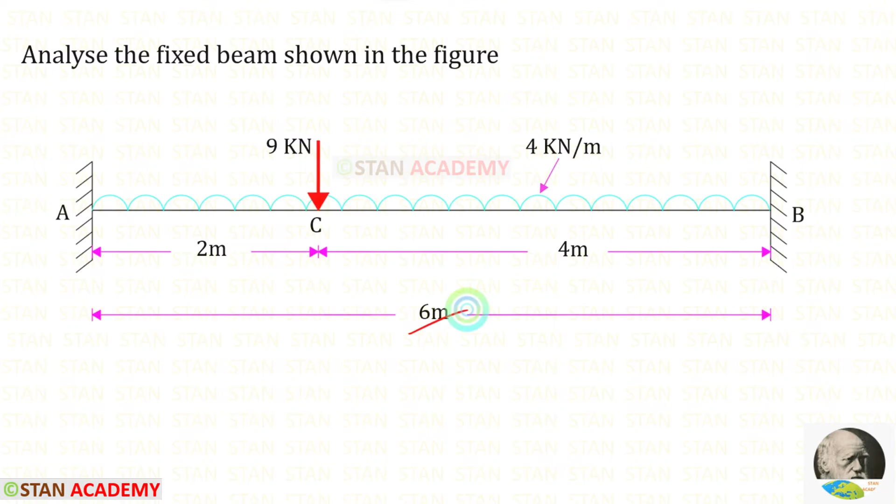To find the fixed end moments at point A and point B, let us use formulas. If the fixed beam is subjected to a uniformly distributed load for the whole span, the formulas to find the fixed end moments are WL square upon 12 and WL square upon 12. Both formulas are the same, but the moment at point A will act in the anticlockwise direction,

and the moment at point B will act in the clockwise direction. If the fixed beam is subjected to an eccentric point load W, the formulas to find the fixed end moments are WAB square upon L square and WA square B upon L square. Here also the moment at point A will act in the anticlockwise direction and the moment at point B will act in the clockwise direction.

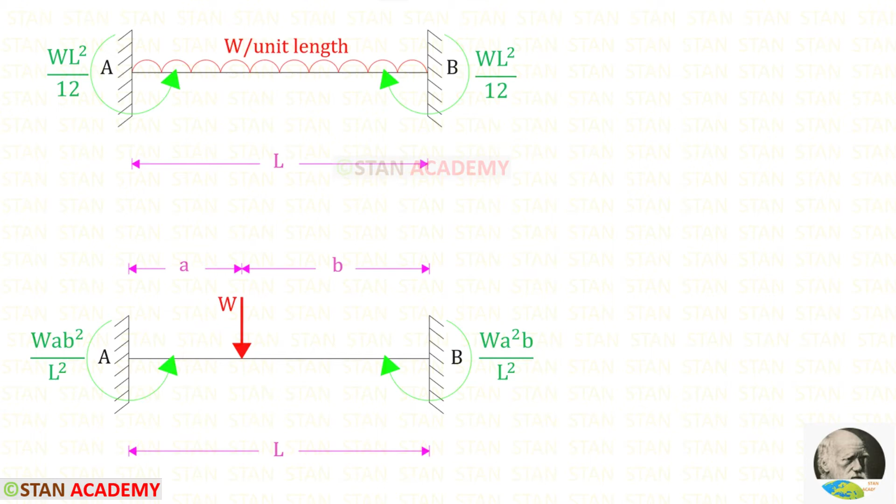Now using these formulas, let us find the fixed end moments. First, let us take the point load 9 kN. We have just seen the formulas WAB square upon L square and WA square B upon L square. Here W is 9, A is 2, B is 4, L is 6. Let us apply them in the formulas.

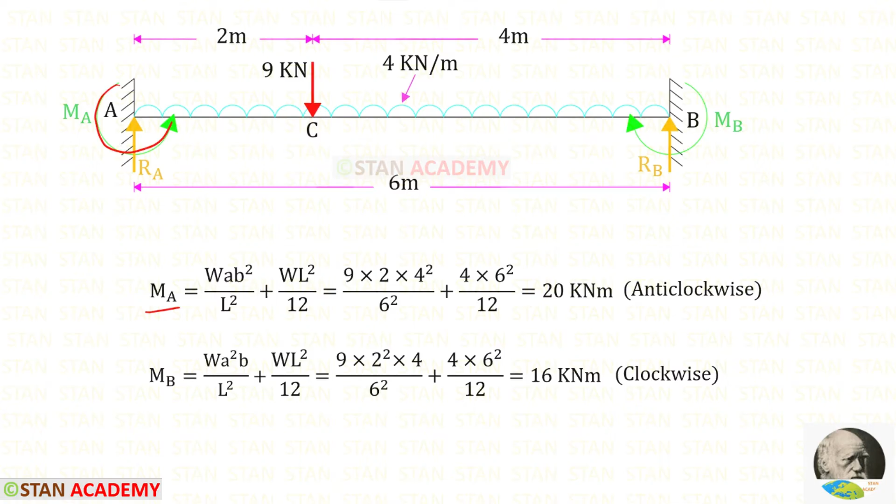Now let us take the uniformly distributed load of 4. We have seen the formulas to find the fixed end moments. Both formulas are the same, WL square upon 12 and WL square upon 12. Here W is 4 and L is 6. When we add these two, we get 20 kilonewton meter, and when we add these two, we get 16 kilonewton meter. We know that MA will act in the anticlockwise direction and MB will act in the clockwise direction. We have calculated the fixed end moments MA and MB.

Now we are going to find the vertical reactions RA and RB. First, let us find RA. For that, I am going to take a moment about B. In this case, we are moving towards the right hand side. Clockwise will be positive and anticlockwise will be negative.

The moment MA is acting in the anticlockwise direction, so it will be negative. RA is acting in the clockwise direction, so it will be positive, and the distance is 6, so 6 RA. The point load 9 is acting in the anticlockwise direction, so it will be negative, and the distance is 4. The UDL 4 is also acting in the anticlockwise direction, so it is also negative. For the UDL, we have to multiply with the distance and the distance by 2. The moment MB is acting in the clockwise direction, so it will be positive. Finally, for RA, we are getting 18.667 kilonewton.

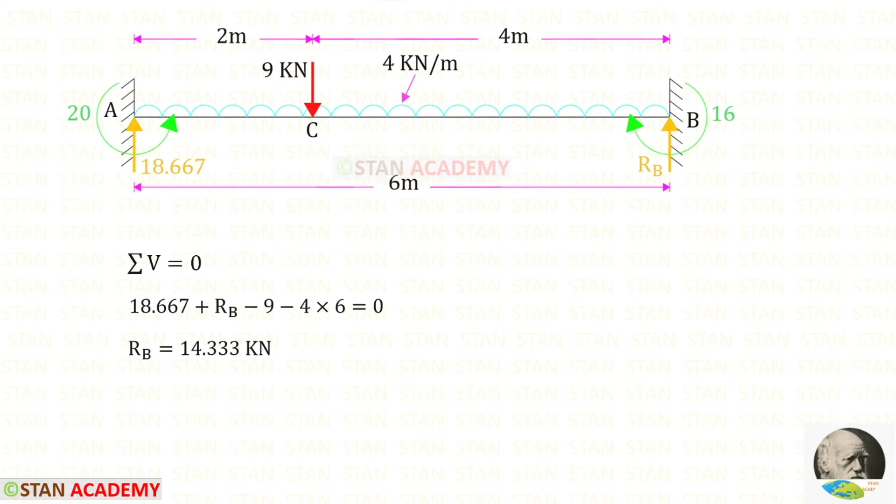Now let us apply the rule sigma V equals 0 and find RB. RA and RB are acting upwards, so both are positive. These two loads are acting downwards, so both are negative. With the UDL, we have to multiply by the distance. Finally, for RB, we are getting

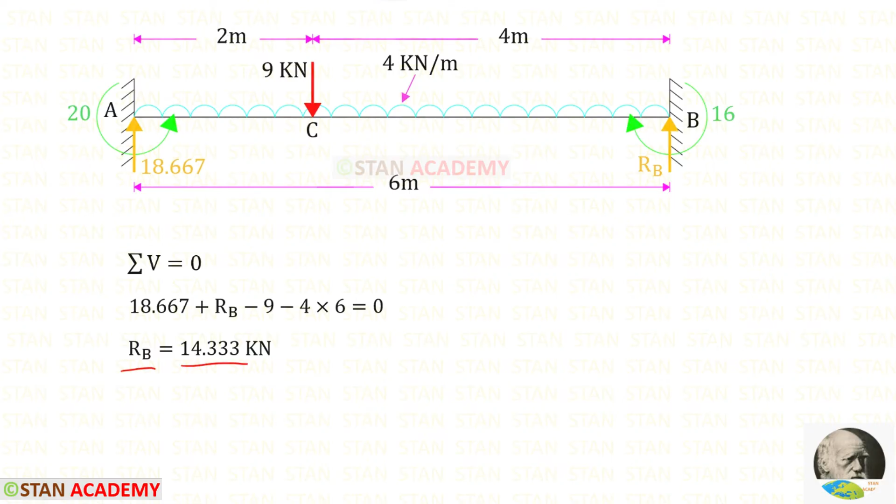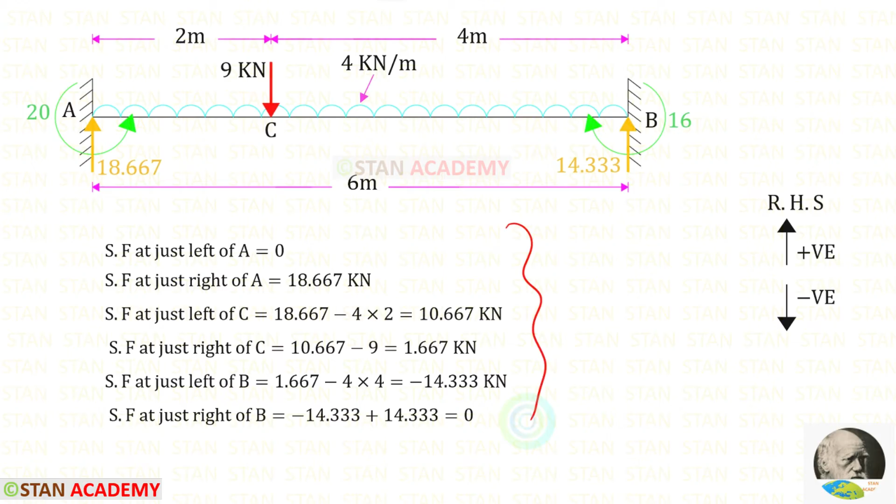14.333 kilonewton. Now we are going to draw the shear force diagram. I am going to find the shear force values from point A towards point B. In this case, I have to follow the right hand side rule: upwards will be positive and downwards will be negative. Here you can see the calculations, and here you can see the shear force diagram.

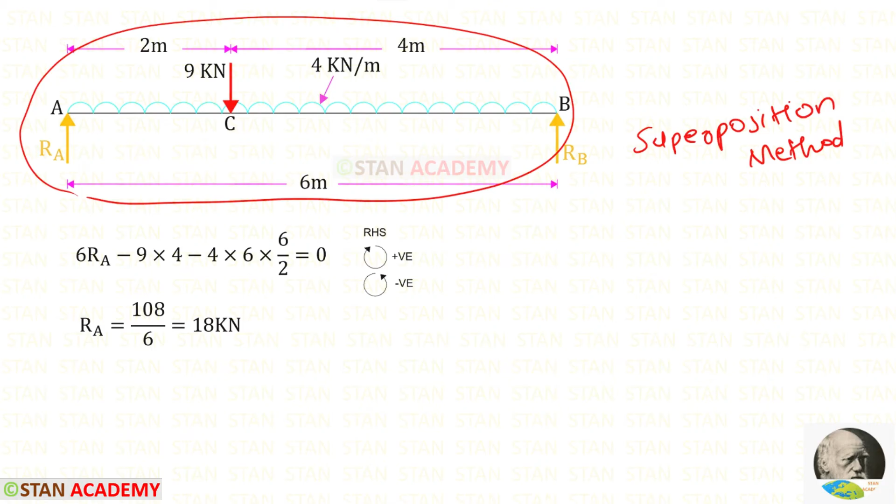Now we are going to draw the bending moment diagram. The bending moment diagram can be drawn in two ways. The easiest method is the superposition method. In this method, first we have to convert the fixed beam into a simply supported beam. You can see that I have converted the fixed beam into a simply supported beam. Now we have to draw the bending moment diagram for this simply supported beam.

First, let us find the reaction RA. For that, I am going to take a moment about B. In this case, I am moving towards the right hand side. Clockwise will be positive and anticlockwise will be negative.

RA is acting in the clockwise direction, so it will be positive, and the distance is 6, so 6 RA. The load 9 kN is acting in the anticlockwise direction, so it will be negative, and the distance is 4. The UDL 4 is acting in the anticlockwise direction, so it is also negative. For the UDL, we have to multiply with the distance and the distance by 2. Finally, for RA, we are getting 18 kN.

Now let us apply the rule sigma V equals 0 and find RB.

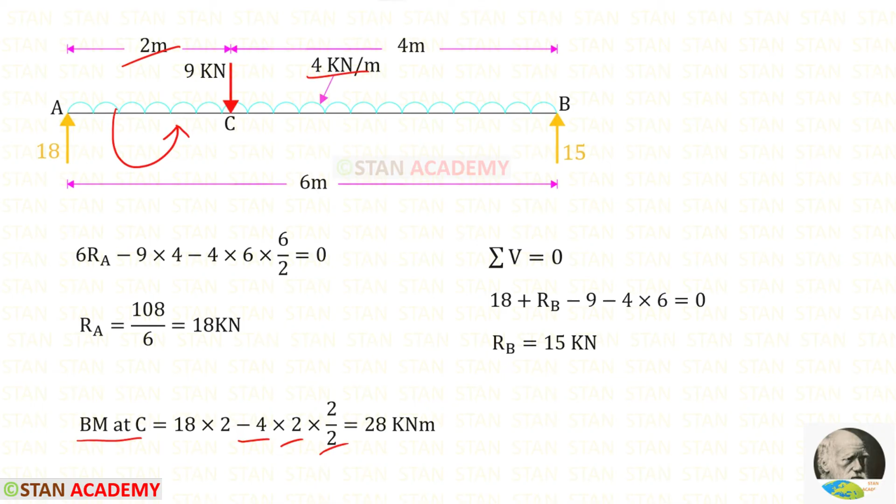Now let us find the bending moment at point C from point A. RA is acting in the clockwise direction, so it will be positive, and the distance is 2. The uniformly distributed load is acting in the anti-clockwise direction, so it will be negative. For the UDL, we have to multiply with the distance and distance by 2. So for the bending moment at C, we get 28 kilonewton meter.

Now we can draw the bending moment diagram. We have a uniformly distributed load for the full span, so the diagram will be in parabolic shape. This diagram is called the free moment diagram, and this diagram is positive.

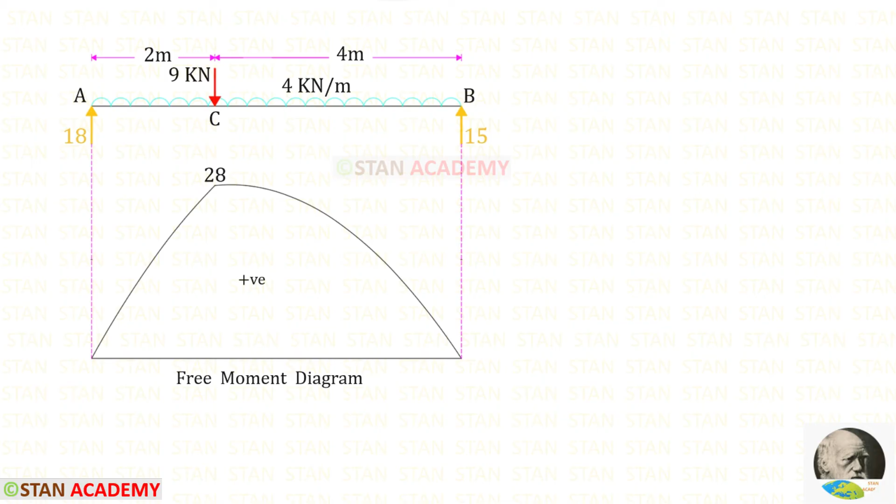Now let us draw the end moment diagram. For MA we have got 20 and for MB we have got 16. We know that MA was acting in the anti-clockwise direction and MB was acting in the clockwise direction. We have to see the direction of the arrows. Both of the arrows indicate upwards, so the diagram will be coming above this line.

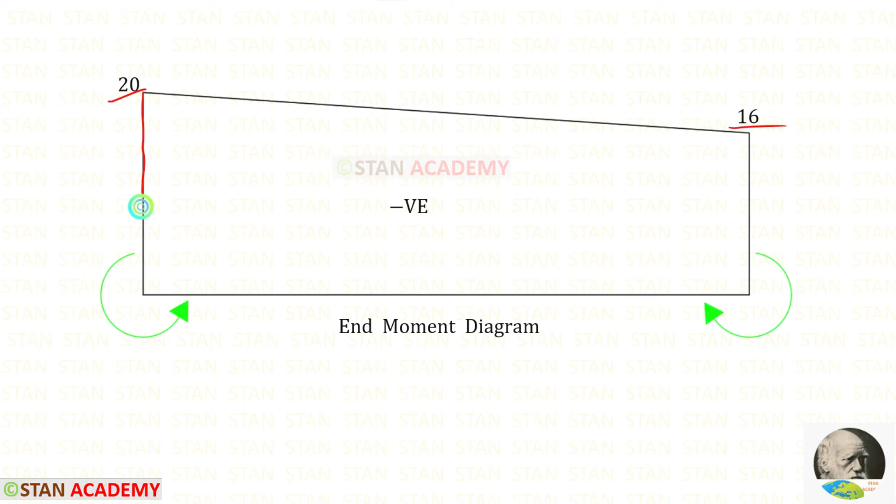Since 20 is bigger than 16, we have to make this line a little higher. Then we can combine both of the diagrams so that we get the bending moment diagram. Where both of the diagrams are combined, we should not mark anything; we just keep the space empty. Wherever they are acting alone, we have to mark with the signs.

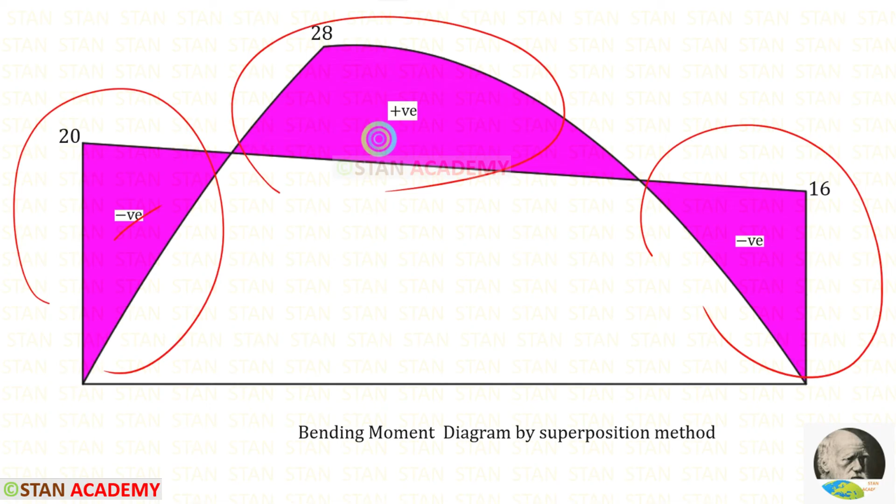We have drawn this diagram by the superposition method. Alternatively, we can draw the bending moment diagram considering all of the points. But it is up to you, you can either follow the previous method or this method, whichever is easier for you.

Here we have to find this ordinate, which is the value of maximum positive bending moment. For that, we have to see the shear force diagram where the shear force becomes 0. At this point, the shear force becomes 0, and at this point, there will be maximum positive bending moment.

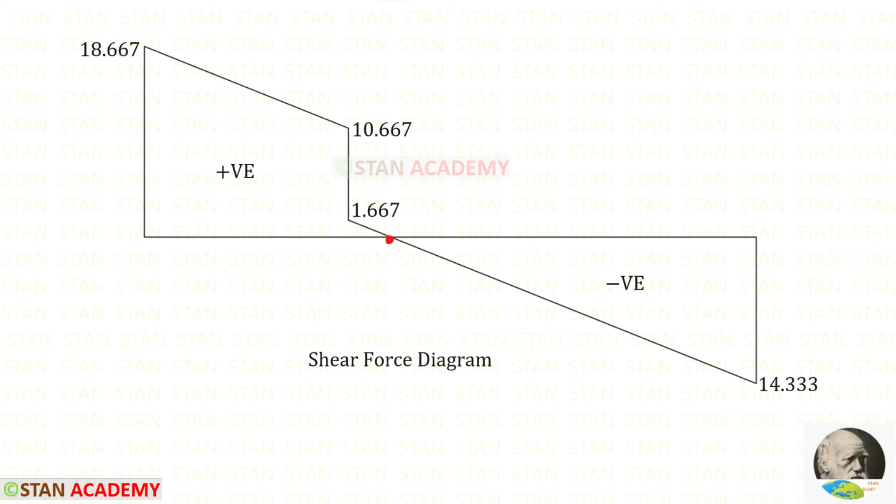At that point, let us make a section at a distance of x from point B. We know that in this section, the shear force is 0. Let us find the shear force from point B. In this case, we have to follow the left-hand side rule: upwards will be negative and downwards will be positive.

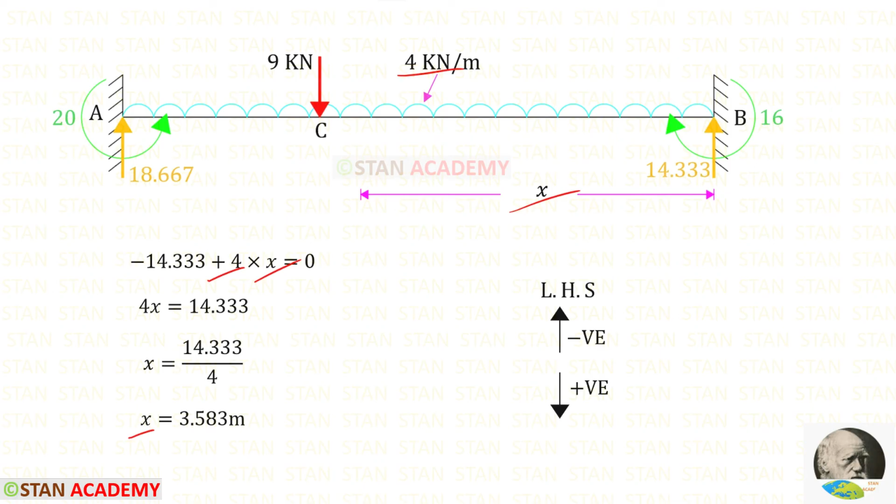RB is acting upwards, so it will be negative. The uniformly distributed load is acting downwards, so it will be positive, and the distance is x. After the calculation for x, we are getting 3.583 meter.

Now let us find the maximum positive bending moment. We are going to find the moment from point B. In this case, we are following the left hand side rule: clockwise will be negative and anti-clockwise will be positive.

This moment is acting in the clockwise direction, so it will be negative. RB is acting in the anti-clockwise direction, so it will be positive, and the distance is 3.583. The UDL is acting in the clockwise direction, so it will be negative. For the UDL, we have to multiply with the distance and distance by 2. For the maximum positive bending moment, we get 9.68 kilonewton meter.

Let us find the bending moment at point B. At point B, we have the moment MB, which is acting in the clockwise direction, so it will be negative. In a similar way, we can find the bending moment under this point load. We will get 9.33 kilonewton meter.

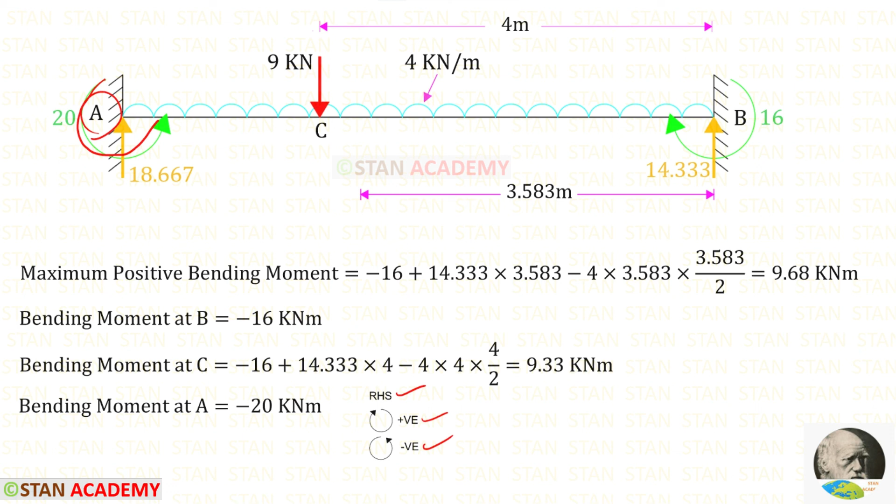To find the bending moment at point A, we can use the right hand side rule: clockwise will be positive and anticlockwise will be negative. At point A, we have MA, which is acting in the anticlockwise direction, so it will be negative. Using the values, we can draw the bending moment diagram.

At these 2 points, the bending moment becomes 0. We can find the location of these 2 points, but it is not necessary. Anyway, I am going to find both of the locations. For that, I have to make sections in both of the points. You can see that I have made sections in both of the points at a distance of x from point A.

First, let us find the distance x in this section. For that, we can use the right hand side rule. Using that rule, for x, we get 1.23 meter. In a similar way, we can find the value of x in this section. We get 4.62 meter.

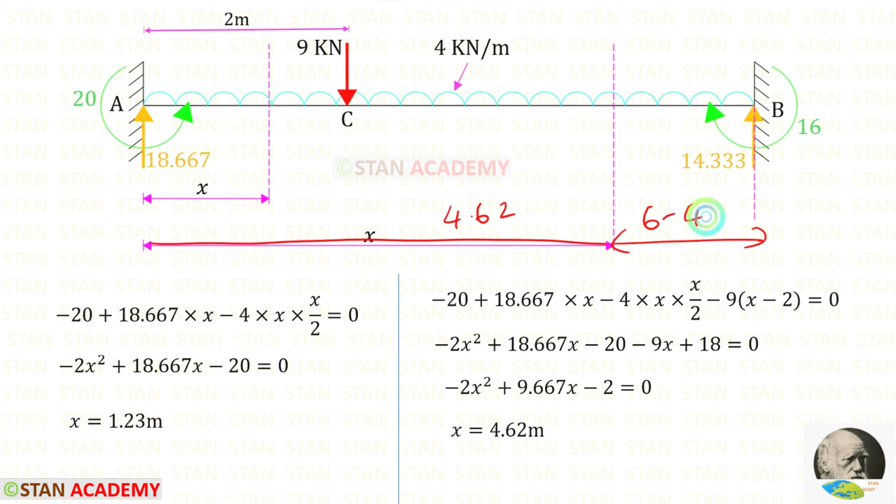If this distance is 4.62, this distance will be 6 minus 4.62. We get 1.38 meter. So we have found both of the locations where the bending moment becomes 0.